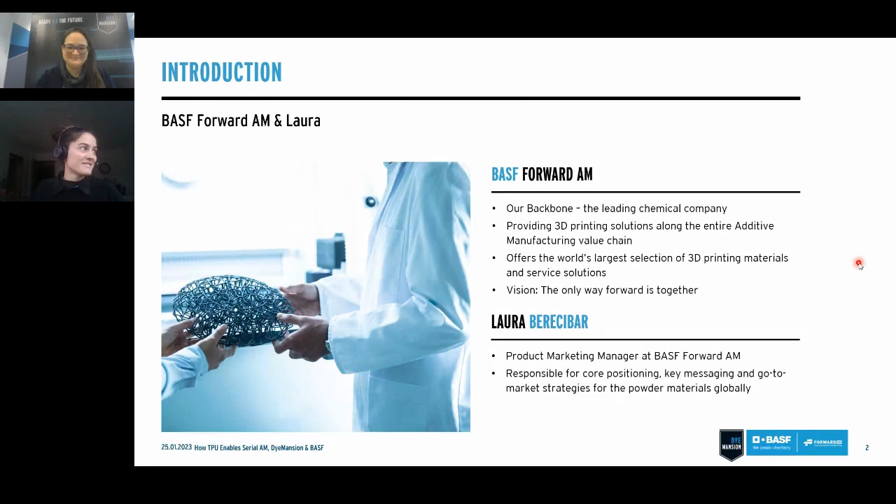Thanks, Laura, for kicking off this presentation. Also from my side, a warm welcome to our audience. I'm Elena, Head of R&D here at DyeMansion. For all of you who haven't had the pleasure yet to work with us, just a few words about DyeMansion and what we are doing.

The company was founded in 2015, and we are the leader in post-processing for industrial polymer 3D printing. Today we are the only provider of a fully integrated end-to-end solution.

It's crucial for us to achieve this goal by focusing on sustainable processes. From my point of view, it's so important to have sustainability in mind in everything we do, and this is also one of the guidelines of my work as Head of R&D here at DyeMansion.

So my team regularly develops new post-processing processes. But for me, it's not only important to have a visually appealing result, but to achieve this result the right way, so it should always be production ready and sustainable.

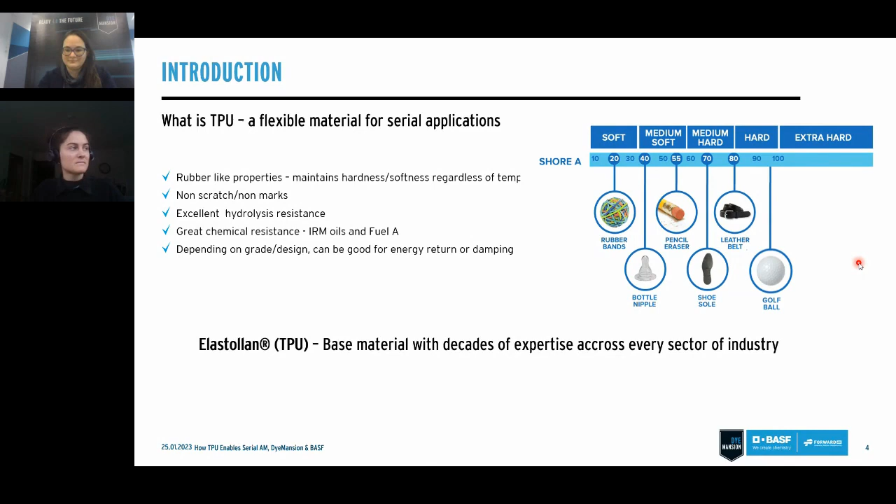I think one of the key things about our Ultrasint TPU01 is that it enables industrialization. This is happening because it was developed with HP for the HP 5200, meaning we have developed a plug-and-play system for our customers to print with ease, with optimal processability, without too much headaches. Thanks to that close collaboration, we are able to deliver a material that has excellent mechanical properties that, as you will see later, will serve many, many applications and industries as well.

But that's not the only reason. Many people decide to go for our Ultrasint TPU01 because not only do we offer the material, but we believe in offering full solutions. So we start from the Ultrasim lattice design. If you guys want to change a form from a lattice design, we are able to support you on that and help you tailor the mechanical properties that you may need. And of course, through the wide options of post-processing that we are offering for TPU due to our close collaboration with post-processing companies like DyeMansion.

But I think now the main question after I told you all of this information is, does the industry actually recognize all those great features of TPU? And as you will see in the next slide, the answer is yes.

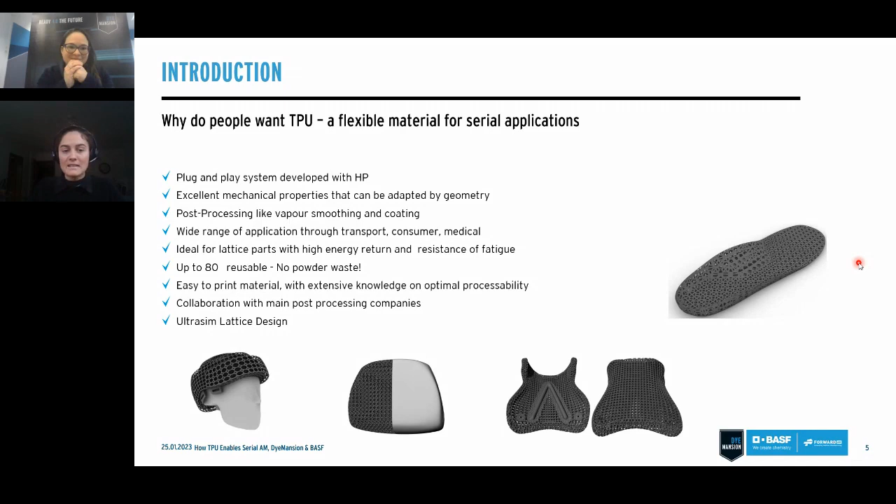Pictures, I think, and stories show more than my words. So here are just some of the few examples of applications that we have developed this year. But I think some interesting ones.

So there's a helmet in the first row, almost at the end. This was developed for the NFL. Companies such as GKN, just below the helmet, have also worked with us on bridge production applications. So I think the answer is indeed yes, the industry recognizes the benefits of this material.

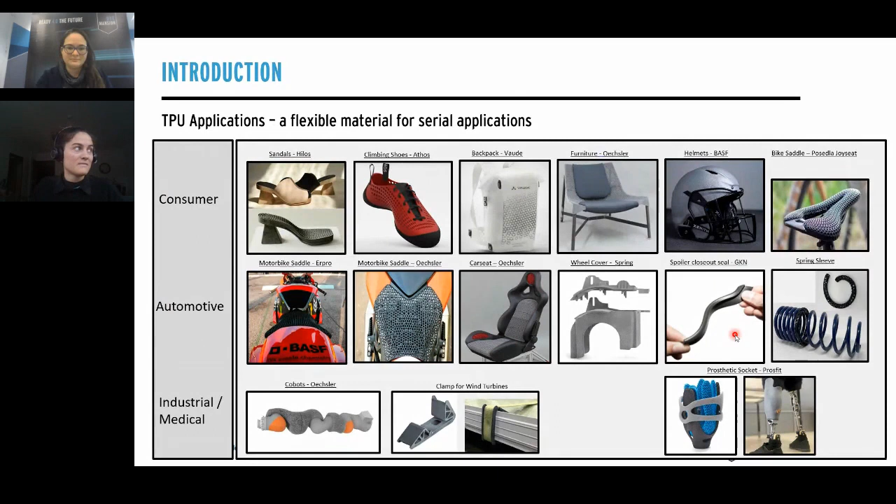Okay, Laura, so it sounds like everything is kind of safe because you have so many impressive applications out there. But do you have an idea why not all companies are using the full potential of TPU yet? I mean, it looks like a perfect thing, but I imagine there could be many, many more applications, right?

Yes, so indeed Alena, even though we see more and more people using our Ultrasint TPU01 from HP, there are still some that are, I don't know if reluctant is the right word, but there is still some misinformation in the industry about this material. The things that I hear most, especially when I go to fairs, are two main things.

The first one is, 'oh my gosh, TPU is horrible to depowder.' And the second one is 'the touch and feel will never achieve the injection molding level.' So I think for our audience, and Elena, maybe you as well at the beginning, will think, are these actual challenges or are these just myths of the market?

Let's start with the depowdering part. For people who don't know about powder bed fusion, PBF technology, depowdering is a key part of any printed part that you want to print. It's essential. There are two intrinsic characteristics of a flexible material like TPU, which are the softness of the material and the rebound of the part, that make depowdering a bit more challenging compared to a normal polyamide. But of course, these are two different materials, so it wouldn't make sense for them to be depowdered the same way, right?

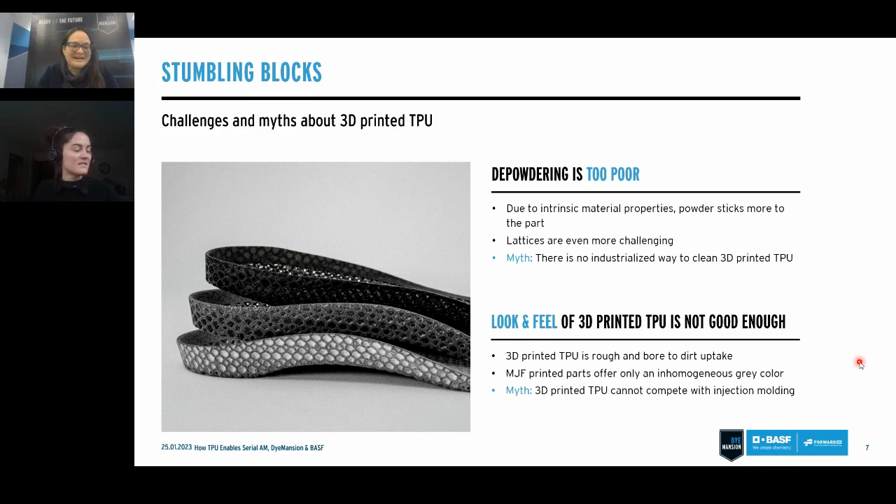But Alina, our most recent solution for these two topics, working with DyeMansion, what can you tell us about the solutions that we have with you? Okay Laura, now you teased it already a little bit, but I'm happy to give you some more insights on how we could solve these post-processing challenges within our joint work over the last years. So let's start with the depowdering.

Laura said it already, depowdering is so crucial for any application, and the same is true for Ultrasint TPU. It's the first step after printing, and you really need to do it well to have perfect parts afterwards. I also have to say that if we only consider the most commonly used blasting material on the market, which is glass beads, this myth unfortunately cannot completely be dismissed. So what we did is examine various materials for their depowdering capabilities to see which works best. Today I want to show you a comparison between glass beads and our new blasting material, the so-called PolyShot PC4 beads, which is a polymeric blasting material.

And as Laura also said in the beginning, pictures say more than words, so please have a look at this comparison. Can you see the difference?

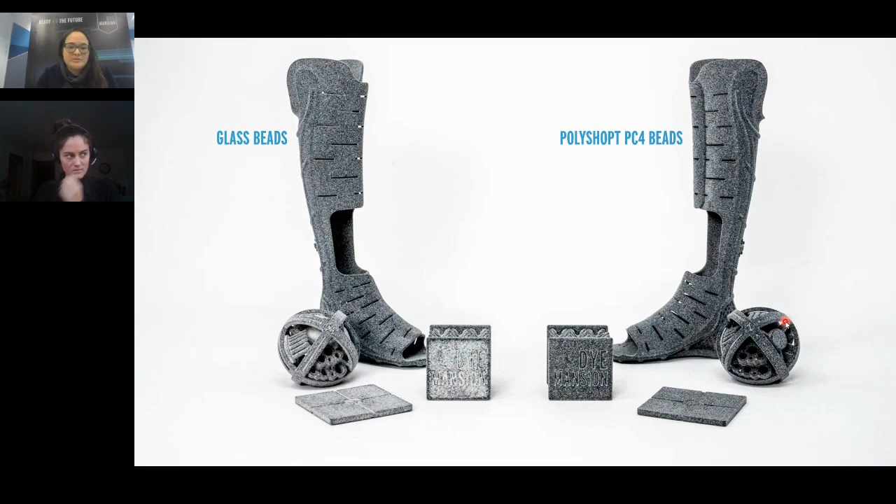Yeah, so I hope with this visual in comparison, you can already see that with the right blasting media, it's not a problem to depowder TPU01. In fact, you get really good depowdering results in the end.

And I don't have a lot to add here, but I want to highlight in addition that this new blasting material also allows us to use it in our industrialized cleaning device with PowerShot C performance. And like this, you can not only depowder TPU in a very good way, but you can also achieve clean parts in a 3 times more efficient way, which is a big benefit if you think about industrialized production.

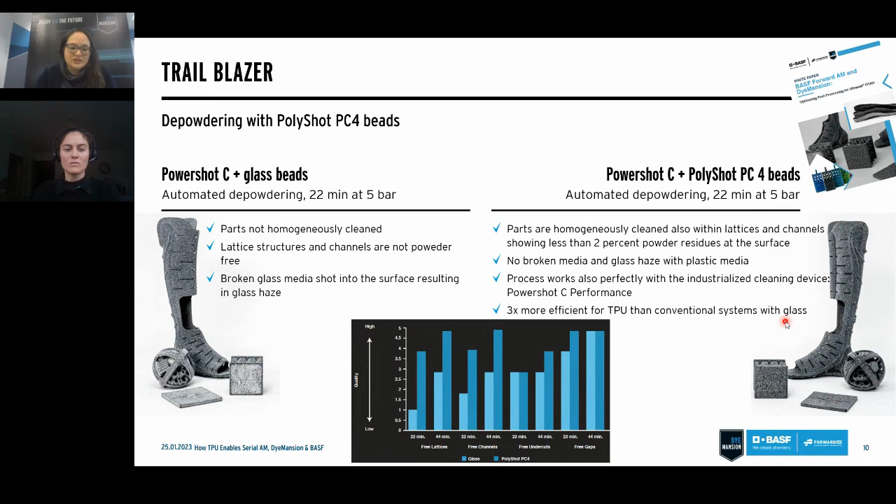So to wrap this up, I can tell you that depowdering TPU is a challenge, but with our collaboration here, we could show that with the PowerShot C performance and the PolyShot PC4 blasting beads, we can perfectly depowder Ultrasint TPU01 in an industrialized way.

And like this, plenty of new applications can benefit from this great material without accepting any disadvantages during depowdering. And I think this is a huge step to many, many more TPU applications out there.

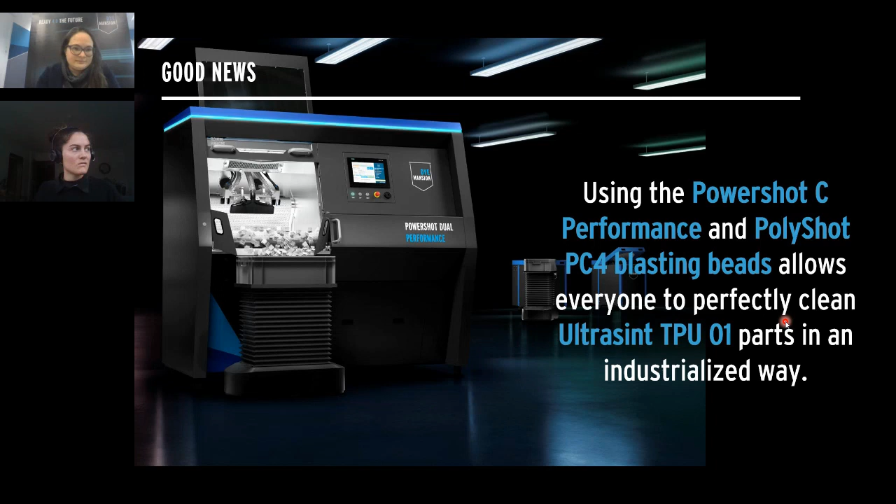Before, Laura also asked about the look and feel. And in fact, if you remember the images of the past slides, a depowdered part is great, but there are some applications out there which might require even more. Because sometimes for your end use application, you have some additional needs which can only be fulfilled with a smooth surface. And for this, we have developed our vapor fuse surfacing technology.

With this technology, you can achieve surfaces which are injection molding like. Laura teased already that there are parts out there where you cannot differentiate between an injection molded and a 3D printed and smoothed part. So having this second post-processing technology, we can also for TPU achieve high quality surfaces.

And this is so important to understand because usually for 3D printed parts, the most well-known surfacing technology is a mechanical process. And this for sure does not work for TPU because it's so flexible. So we really need a different process.

And here the vapor-based vapor fuse surfacing technology helps a lot because a solvent vapor condenses on the surface of the part, and like this can slightly dissolve the outer areas, and the polymer chains can rearrange. And after removing the solvent again, we end up with way smoother surfaces, as you can see them here on the left.

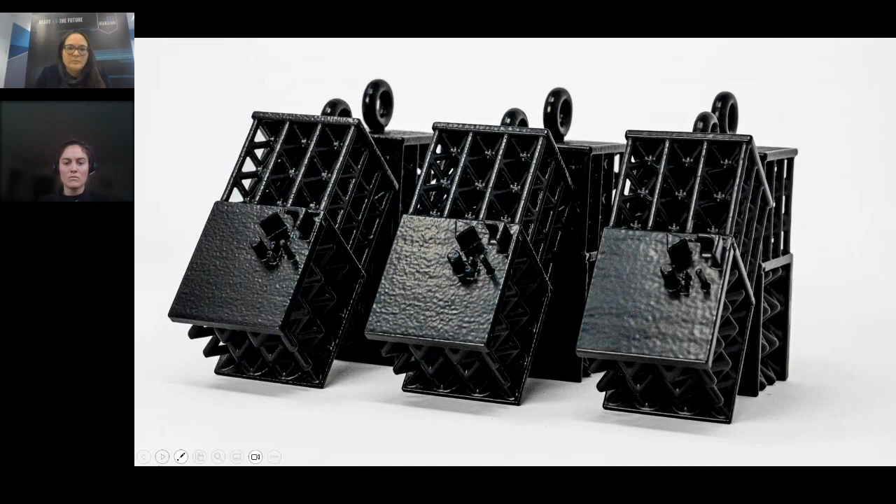So this technology is perfect for flexible materials, and especially aesthetic parts benefit from the superior look and feel. And here I want to highlight one additional benefit of our technology, because it's not like you can only smooth the parts. No, we have the possibility to achieve different levels of smoothing.

So depending on your application, you can either go for a light smoothing, as you can see it here on the left, for example if you only need a sealed surface, or you can go to the strong smoothing, which you can see here on the right, if you really want to have a final application which is super glossy.

However, vapor fuse surfacing is way more than just tuning the aesthetics. Due to the smoothing effect, also the mechanical properties are improved. If you already work with TPU, especially with lattices having very thin struts, you might have struggled with those struts breaking too easily.

And this is a big benefit for many applications, especially if the part is mechanically stressed. So if you think about shoe soles, saddles, or industrial components, like for example this gripper here, then the improved mechanical properties help a lot to really get this application running and working for a long time.

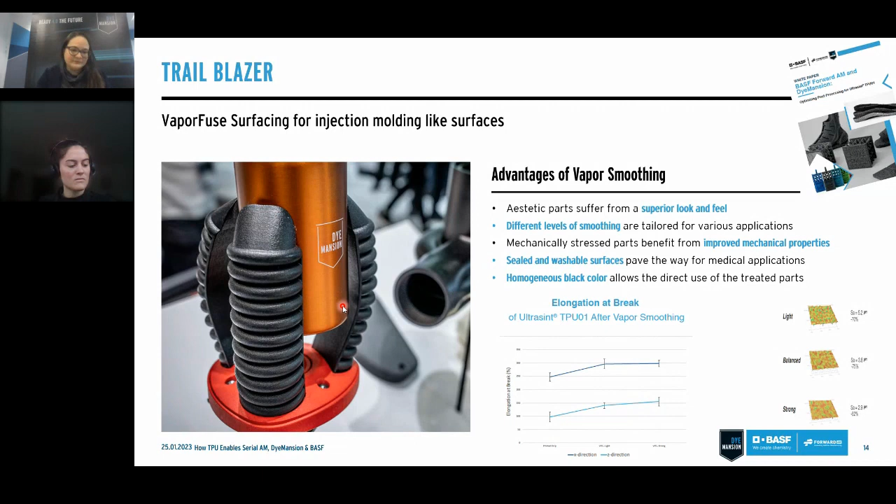So to conclude here, I hope I could show you that vapor fuse surfacing enables many applications for 3D printed Ultrasint TPU, which could not be realized without the smoothing, because you might need certain surface properties or mechanical properties, or just the look and feel of the only depowdered part does not meet your expectations.

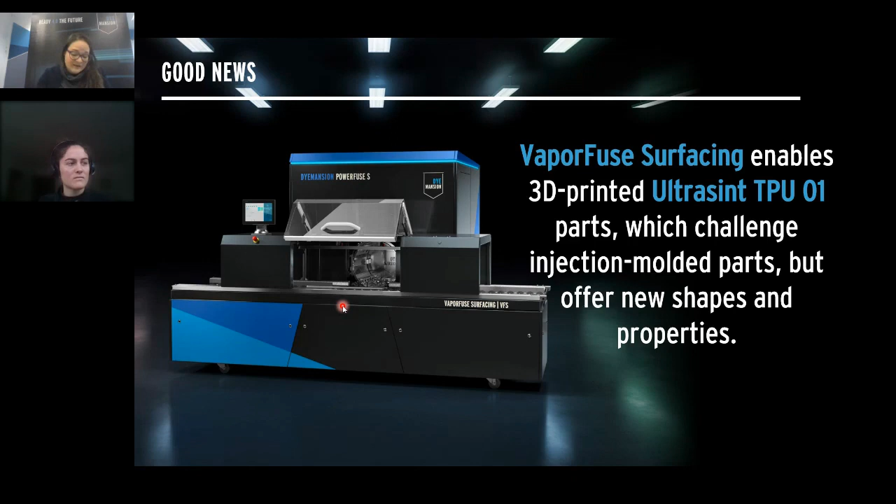But it's not only challenging injection molded parts now. The big benefit if you go for 3D printing of TPU in combination with the smoothing technology is that you can now use a variety of new shapes and thus achieve different properties which cannot be realized with injection molding parts. So having said all this, I hope that the myths about 3D printed TPU should be a thing of the past. Or what do you think, Laura?

Okay, yeah. So thank you, Lina. I hope everyone really understood the point that we are trying to make today. Understanding how HP, TPU, and TPU from BASF and DyeMansion collaboration allows us to have this solution for industrialization that we were discussing at the beginning. And I think, as you said, Alina, with the creative audience that we probably have right now, people probably are thinking of many ways to use this solution.